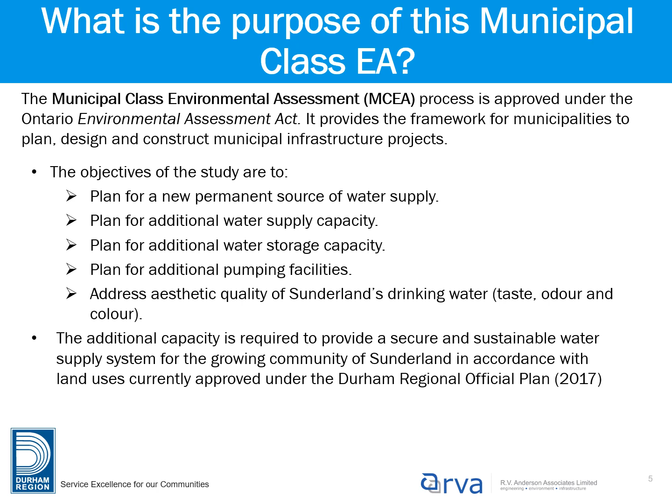As a summary of the project progress to date, this study started in February 2019 with the publication of the Notice of Commencement. The project team identified a problem and opportunity statement, preliminary water supply and water storage alternatives, and proposed evaluation criteria. The project team presented these to the community at the first PIC in June 2019.

Following PIC number 1, the project team completed several supporting studies, including a groundwater exploration program, hydrogeological modeling, natural environmental inventory, cultural heritage assessment, archaeological assessment, and geotechnical investigations. The team then evaluated the alternative solutions for water supply and water storage and identified the preferred alternatives for each, along with phasing to implement the preferred alternatives as Sunderland grows. This brings us to the end of Phase 2 of the Class EA process, where the evaluation results and preferred alternatives are being presented for feedback as part of this PIC.

As a refresher from the first PIC, the study team identified the study area for the project. The study area included as part of this Class EA is outlined in the map on the right-hand side of this slide in the red box. The study area includes the existing urban area boundary for Sunderland, which is outlined in yellow, areas nearby the existing boundary, and the areas where existing municipal wells number 1 and number 2 are located, by Concession Road 6, and the existing water storage standpipe and temporary municipal well number 3 by Jane Street.

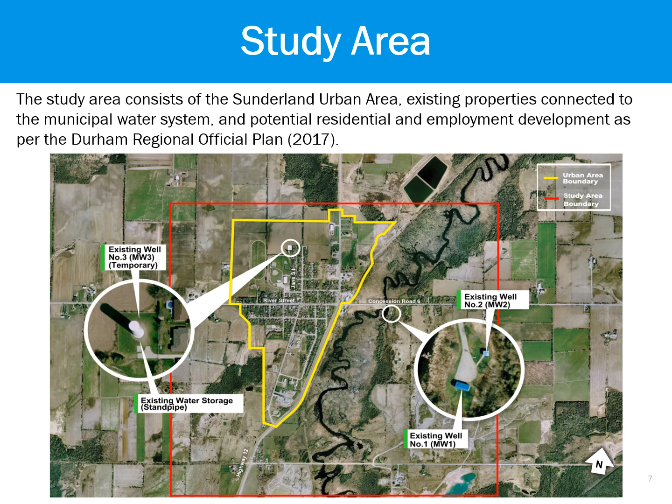From the first PIC, the study team also identified the problem and opportunity statement for the project. The existing Sunderland water supply and storage system requires various improvements to support potential growth for the Sunderland urban area, including upgrading the available water supply, addressing aesthetic water quality, increasing the amount of water storage, and improving the redundancy of the overall system. To address these improvements, this Class EA will identify the preferred environmentally and financially responsible solution.

This solution will provide long-term water supply, water storage capacity, pumping facilities, and redundancy to satisfy existing water demands and support potential growth within the existing Sunderland urban area, as per the land use currently approved under the Durham Regional Official Plan 2017.

Number 2, meet Ontario's drinking water standards for health-related parameters. Lastly, number 3, strive to address aesthetic aspects of the Ontario drinking water standards.

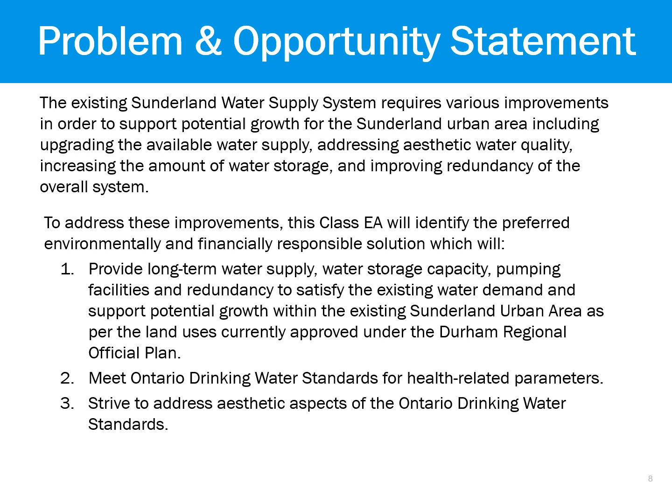Additional studies were undertaken throughout this Class EA to support the development of a list of alternatives, identify potential impacts, identify mitigation measures, and support the evaluation process. Studies include a groundwater exploration program, a geotechnical investigation, hydrogeological modeling, an archaeological assessment, a cultural heritage assessment, and a natural environmental impact assessment.

The results of these studies are included in various aspects of the EA process and presented throughout the upcoming slides.

Now we will go through the water supply aspect of this Class EA. This includes an overview of the existing municipal water system in Sunderland, a timeline of changes to the water supply system, a discussion of the upgrades required and possible solutions, and a recommendation on how to address Sunderland's water supply requirements now and in the future.

The current municipal water system servicing the Sunderland urban area is comprised of 3 municipal groundwater wells. Municipal Well Number 1, or MW1, was built in 1957 and is classified as a groundwater under the direct influence of surface water, or GUDI, with in-situ filtration. Currently, MW1 is only able to operate and supply water at a rate of 8.2 liters per second due to existing operational limitations. However, it does have a higher permitted rate.

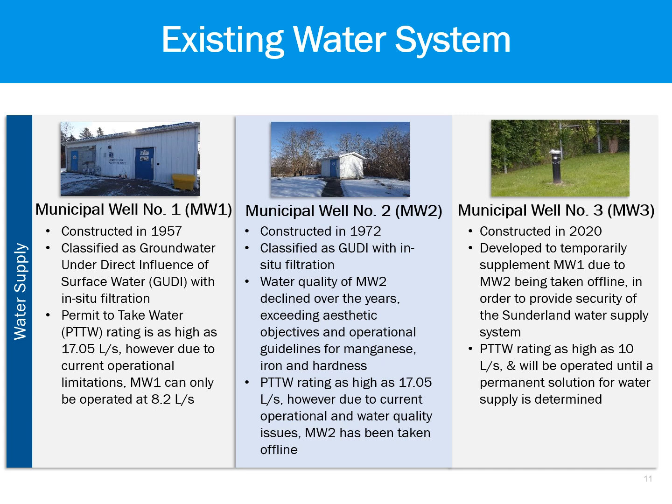Slide 12 provides an overview of the timeline of changes to the Sunderland water supply system and the current Class EA process. In the summer of 2017, MW2 was taken offline as a result of operational and water quality issues. This meant that MW1 was the only well remaining operational to provide water supply to Sunderland.

Due to this, between the summer of 2017 and mid-2018, the region undertook an emergency well exploration program to urgently find a backup groundwater source to supplement MW1. The region identified a new source at the same property as the existing standpipe.

Additionally, during this time, the Ministry of Environment, Conservation and Parks issued a declaration order to permit the installation of an emergency well, i.e. MW3. This order also required the region to complete a Class EA to address Sunderland's long-term water supply needs.

From 2018 to 2020, the region completed the design and construction of the emergency well MW3 and the associated treatment system at the site of the existing Jane Street standpipe. This temporary well has been operating with MW1 to supply water to Sunderland since then.

For the Class EA required by the Ministry, the notice of commencement was issued in February 2019, and the first PIC was held in June 2019. A groundwater exploration program to secure a long-term source of water was completed between winter 2019 and 2020.

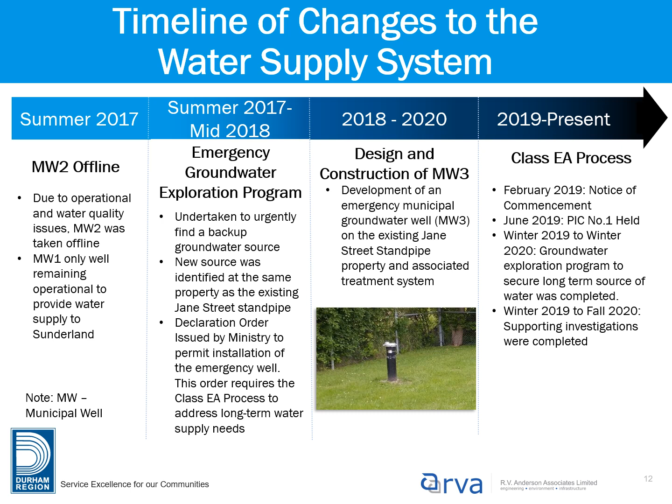As a refresher from the first PIC, this slide presents the required upgrades to the Sunderland water supply system for the long term. We know that the population of Sunderland will grow over time and have estimated that it may grow as high as 4,372 people for the ultimate build-out scenario.

This number is based on the land uses currently approved under the Durham Regional Official Plan. It is important to note that the timeline for this growth from the current date to ultimate build-out is variable. The region will continue to monitor the community's population growth to identify when upgrades are required to the water supply and water storage systems. These upgrades would be implemented in phases over time.

Sunderland's current firm water system capacity is 8.2 liters per second. This total capacity is based on the water supply available to meet the water demands of Sunderland if the largest well is out of service.

Looking to the future, the estimated firm capacity required is 31 liters for ultimate build-out. With MW1 currently operating at 8.2 liters per second and MW3 temporarily operating up to 10 liters per second, the firm capacity of the existing system does not meet the community's needs.

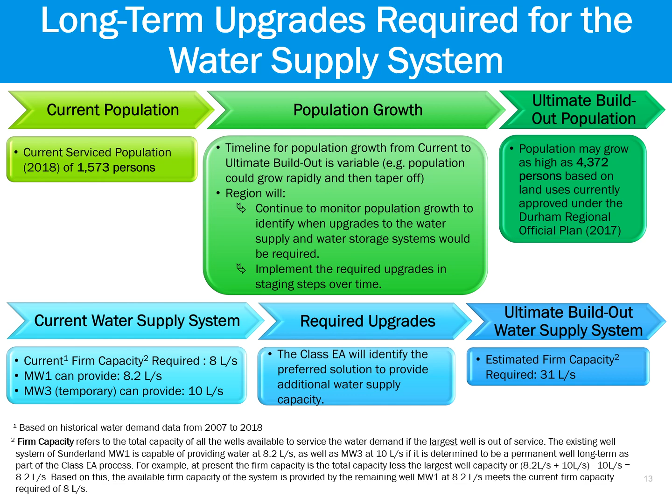Due to this, PIC number 1 identified that additional water supply is needed, and the number of new wells and phasing of the development of these wells would be identified as part of this Class EA.

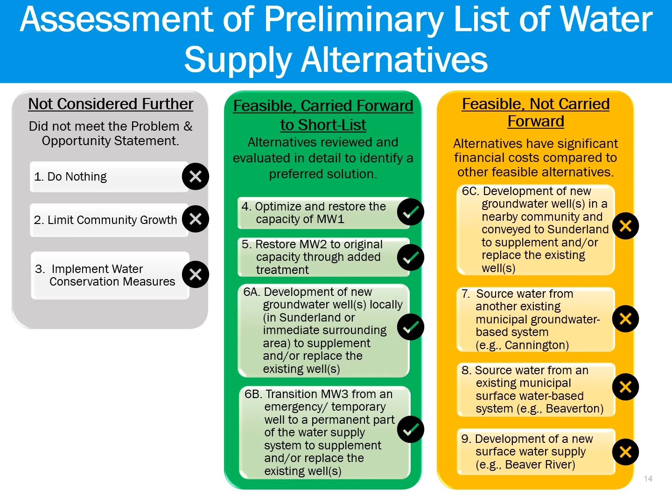A groundwater exploration program was completed in winter 2020 as part of the evaluation of Alternative 6A, development of a new local groundwater well in or immediate to the Sunderland urban area. This program included drilling test wells to determine whether there is a viable groundwater source with sufficient quality and quantity to meet the ultimate build-out needs.

The groundwater exploration program included 3 areas. Area A included the future parkland property west of the existing Jane Street standpipe, and an area to the far west on the Kaitlin Corporation property proposed for future development. Overall, Area A produced a good quantity of water. However, the water quality would require additional treatment, for example, to lower nitrate concentrations.

Area C is on existing property owned by Brock Aggregates just off Concession Road 6 and to the east of existing municipal wells 1 and 2. The groundwater exploration program for this area found that there was good quality of water, however, there was limited quantity.

The final area shown on the map is Area B, which is the right-of-way of Concession Road 5 and St. Mary's Boulevard to the southwest of Sunderland. Area B was not explored as a result of Areas A and C being favorable, and because Area B would be technically complex and have higher economic costs to implement, as it is further away from Sunderland and the existing municipal water system.

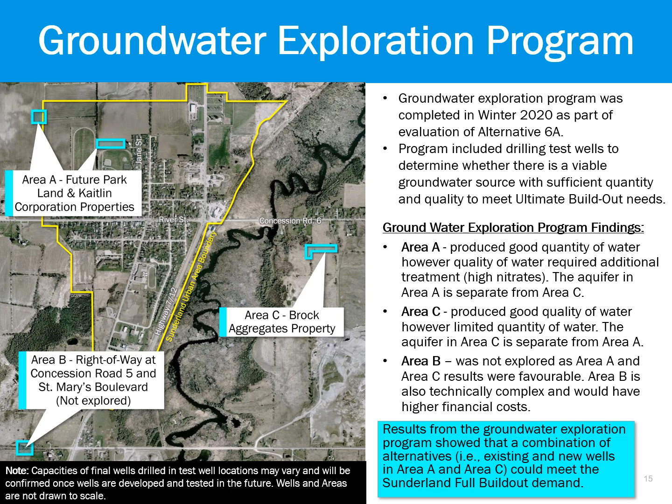The final capacities of the permanent wells may vary depending on the conditions encountered at that time.

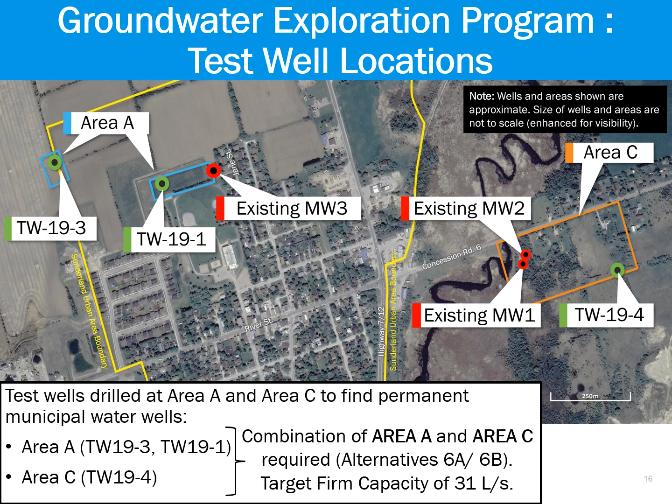The groundwater exploration program also confirmed that Area A and Area C are separate aquifers. This means that using wells in Area A, for example, will not affect the use of wells in Area C, and that both wells have separate water quality characteristics. This provides an opportunity to not only have redundancy of the wells themselves, but also of the aquifers, which are the source of water for Sunderland, leading to a more secure long-term water system if wells are developed in both areas.

Alternative 4, to optimize and restore the capacity of MW1, was not carried forward as a preferred alternative for a long-term water source. MW1 has existing operational and maintenance issues with the existing UV treatment system. It also has deficiencies that limit the ability to increase the flow from the well any further than the existing 8.2 liters per second.

Issues and deficiencies include a decrease in water quality when the well is pumped at a higher flow rate, concerns that the issues with MW2 could occur at MW1 over time, aging infrastructure, operations and maintenance issues with the existing pump house, and that it is located on a moderate to highly vulnerable aquifer, which could require source water protection for MW1. MW1 will continue to be used in the near term, but it is recommended that this well be phased out of service and decommissioned.

Alternative 5, to restore MW2 to its original capacity through additional treatment, was also not carried forward. The existing operational and maintenance issues and deficiencies with MW2 limit the ability to restore this well. In 2017, maintenance of this well was undertaken to try to restore the capacity and quality of the well. However, the water quality remained poor, and the shallow overburden aquifer and confining layers MW2 draws water from was damaged.

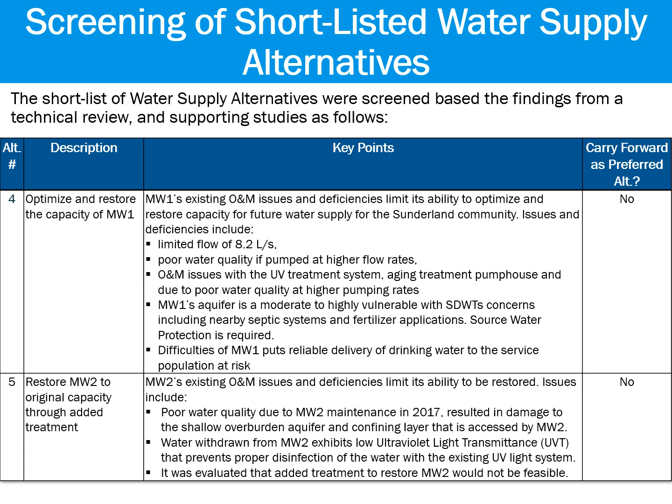Based on the results of the Groundwater Exploration Program, Alternative 6A, to develop a new groundwater well or wells in Sunderland or the immediate surrounding areas to supplement or replace the existing well or wells, was determined to be a feasible alternative. As such, Alternative 6A was carried forward for further evaluation.

Alternative 6B, to transition MW3 from a temporary well to a permanent part of the water supply system to supplement or replace the existing wells in Sunderland, was determined to be feasible, but only in combination with Alternative 6A, where a new groundwater well is still developed. The findings of the Groundwater Exploration Program identified that the capacity of MW3 would not be able to meet the ultimate build-out capacity on its own or with the existing capacity of MW1. As such, Alternative 6B was carried forward for further evaluation in combination with Alternative 6A.

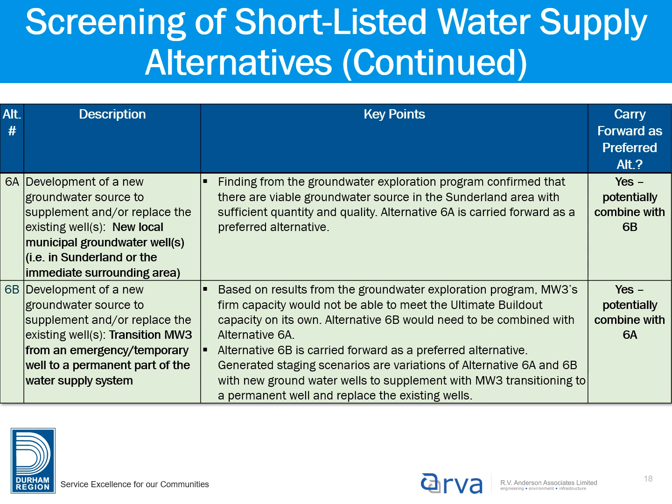Based on the preferred Alternative 6A and/or 6B, potential well capacities and combinations of new wells in Area A and Area C were considered. Considerations included the possibility of transitioning MW3 to a permanent well. Additionally, the phasing of the implementation of a new well, MW3 being transitioned to a permanent well, and when MW1 is taken out of service was reviewed to allow the Sunderland water supply system to be expanded gradually as the demand for water supply grows. 3 staging scenarios were developed and evaluated to meet the ultimate build-out firm capacity requirement of 31 liters per second and are presented on the next slides.

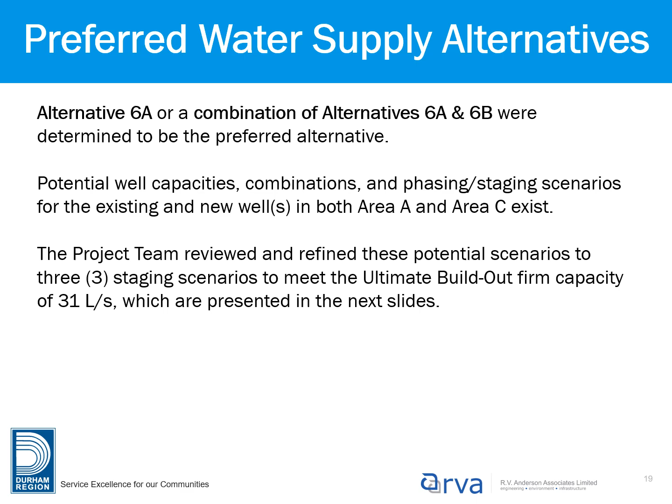As a brief overview, Staging Scenario 1 would be completed in 2 phases. During Phase 1, MW1 would remain online, and MW3 would remain online as a temporary well. New wells would be constructed at the Kaitlin property in Area A by TW19-3. It is estimated that 2 new wells would be required here, 1 duty and 1 standby, with 1 new pump house. Treatment of nitrates is required. This achieves a firm capacity of 31 liters per second within Phase 1.

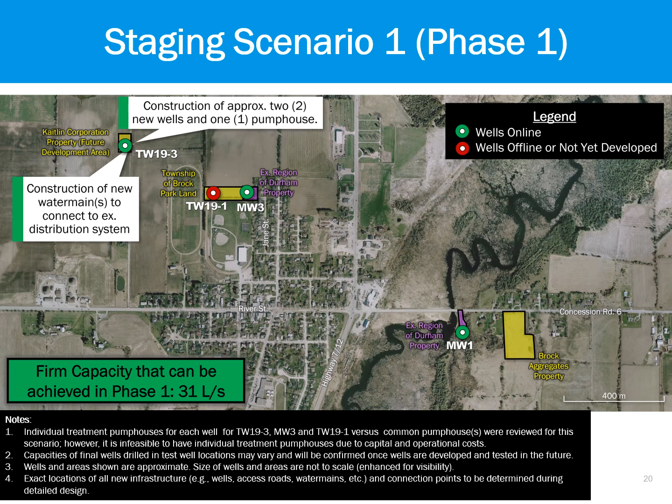In Phase 2 of Staging Scenario 1, MW1 would be decommissioned. The MW3 site would be transitioned to a permanent well, and the existing Nuterra treatment system would be decommissioned. The wells at the Kaitlin property in Area A by TW19-3 would continue to be used. New wells would be constructed at the parkland of Area A by TW19-1, with 1 new well estimated to be required. The pump house at the Kaitlin property would be upgraded to treat water from MW3 and the new well at the parkland. This achieves a firm capacity of 32 liters per second by Phase 2.

Additionally, the region would be looking to secure and protect the land by TW19-4 for a future well site, if determined to be required. The project team also looked at having individual pump houses for each well site, rather than one common pump house for treatment. This was determined to be infeasible due to the operation and maintenance requirements and high economic cost.

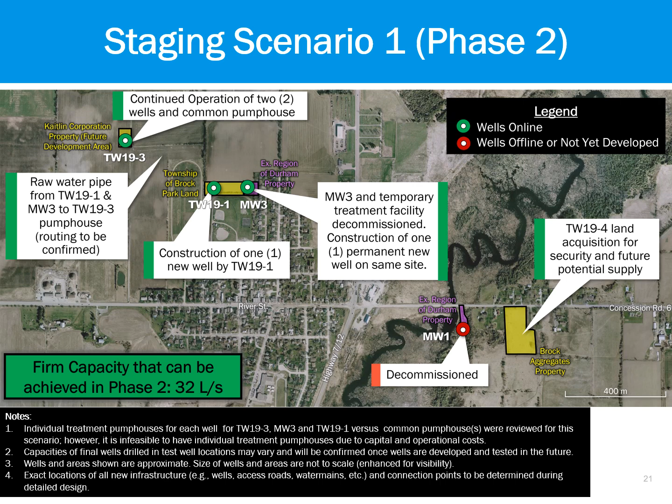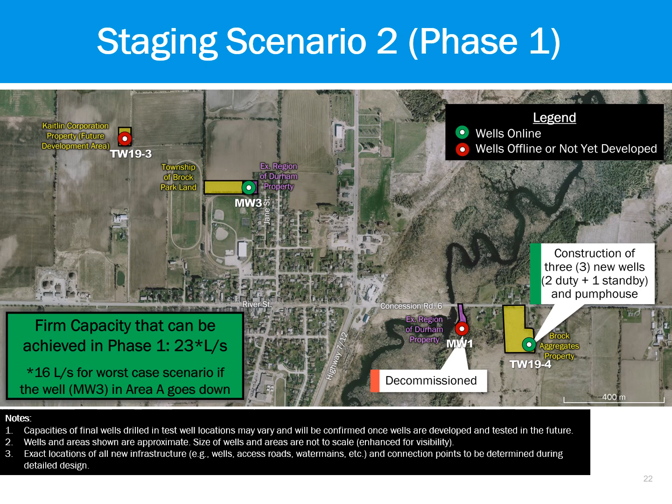Staging Scenario 2 would be completed over 2 phases as well. Phase 1 includes MW3 remaining online as a temporary well. New wells would be constructed at the Brock Aggregates property in Area C by TW19-4. It is estimated that 3 new wells will be required, 2 duty and 1 standby. A new pump house would be constructed to treat these wells. MW1 would then be decommissioned once the new wells in Area C are operational. This achieves a firm capacity of 23 liters per second within Phase 1, with a worst case of 16 liters per second if a well in Area A is out of service unexpectedly.

In Phase 2 of Staging Scenario 2, the new wells and pump house at Brock Aggregates property in Area C by TW19-4 would continue to be used. New wells would be constructed at Kaitlin property in Area A by TW19-3. It is estimated that 2 new wells would be required here, 1 duty and 1 standby, with 1 new pump house. Treatment of nitrates is required. MW3 and its Nuterra treatment system would be decommissioned once the new wells on the Kaitlin property are operational. This achieves a firm capacity of 32 liters per second by Phase 2.

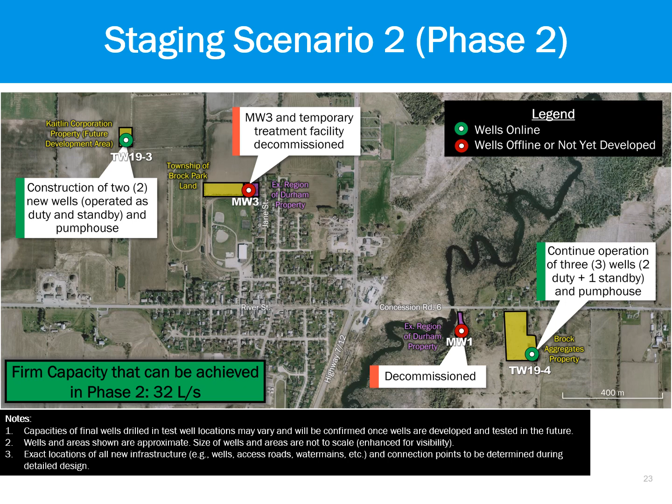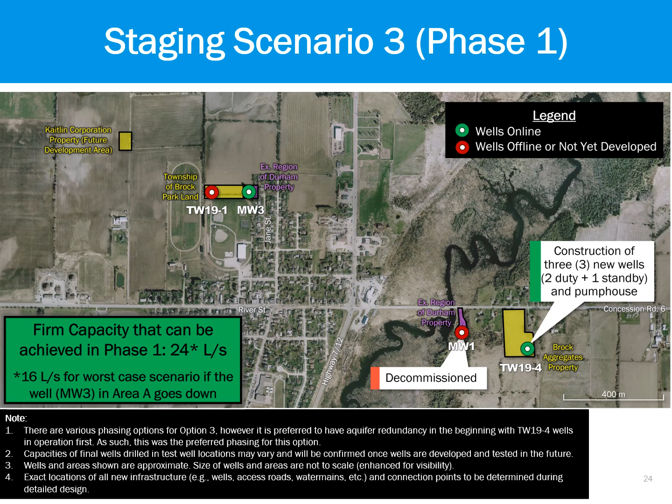Staging Scenario 3 would be completed in 2 phases. In Phase 1, MW3 would remain online as a temporary well. New wells would be constructed at Brock Aggregates property in Area C by TW19-4. It is estimated that 3 new wells would be required, 2 duty and 1 standby. A new pump house would be constructed to treat these wells. MW1 would then be decommissioned once the new wells in Area C are operational. This achieves a firm capacity of 24 liters per second within Phase 1, with a worst case of 16 liters per second if a well in Area A is out of service unexpectedly.

In Phase 2 of Staging Scenario 3, the MW3 site would be transitioned to a permanent well. The existing Nuterra treatment system would be decommissioned, and a new pump house would be constructed. The wells and pump house at the Brock Aggregates property in Area C by TW19-4 would continue to be used. New wells would be constructed at the parkland of Area A by TW19-1, with 1 new well estimated to be required. The raw water from this well would be treated at the new pump house at the MW3 site. This achieves a firm capacity of 32 liters per second by Phase 2.

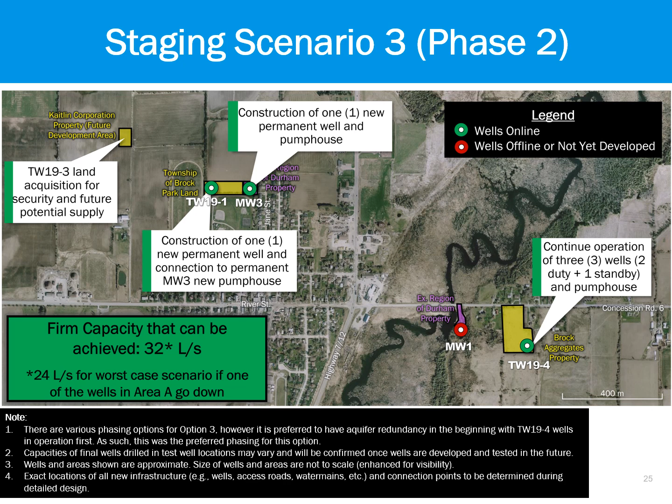Additionally, the region would be looking to secure and protect the land by TW19-3 in the Kaitlin property of Area A for a future well site, if determined to be required. The project team also identified that it is preferred to have aquifer redundancy as soon as possible. This staging scenario looks at developing new wells in Area C while keeping wells in Area A online. Staging scenarios which did not prioritize aquifer redundancy were identified and not evaluated.

Slide 26 summarizes the preferred wells and requirements for phasing of the 3 staging scenarios presented in slides 20 to 25. In summary, Staging Scenario 1, Phase 1 will achieve ultimate build-out capacity early and will provide aquifer redundancy. In Phase 2, the ultimate build-out capacity will continue to be achieved and will reduce the risk of relying on MW1 long-term, with MW1 decommissioned. However, there will be no aquifer redundancy once MW1 is offline.

For Staging Scenario 2, a firm capacity of 24 liters per second will be achieved in Phase 1. This allows for growth. However, ultimate build-out firm capacity is not achieved during this phase. Phase 1 will also reduce the risk of relying on MW1 long-term and will provide aquifer redundancy. In Phase 2, ultimate build-out capacity will be achieved. However, temporary MW3 will be decommissioned, and the associated infrastructure will not be used long-term.

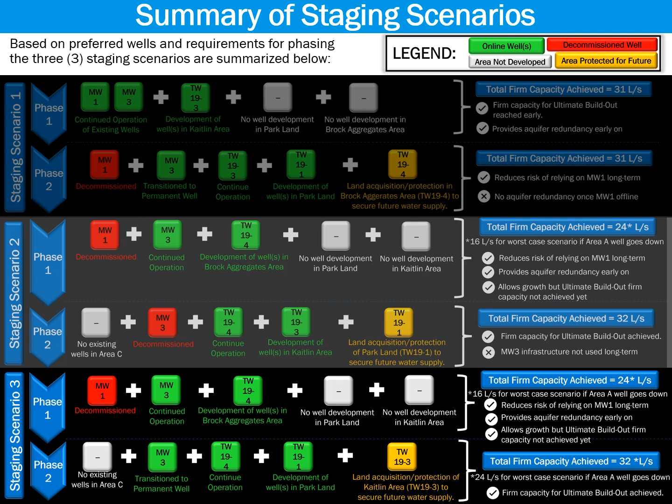For Staging Scenario 3, a total firm capacity of 24 liters per second will be achieved in Phase 1, which allows for growth. However, ultimate build-out firm capacity is not achieved during this phase. Phase 1 will also reduce the risk of relying on MW1 long-term and will provide aquifer redundancy. In Phase 2, ultimate build-out capacity will be achieved.

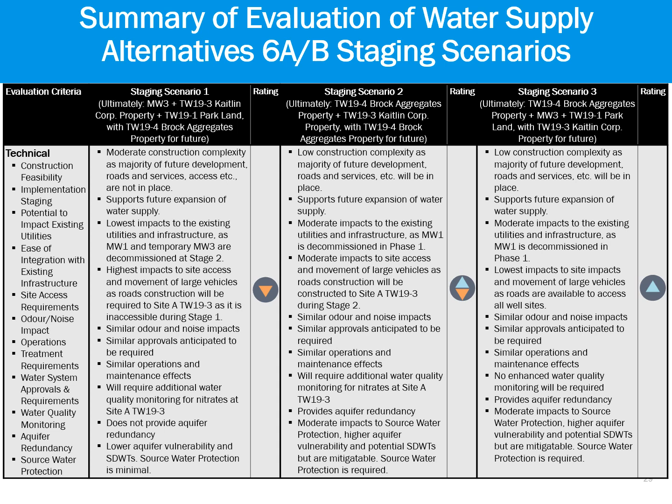Economic: Scenario 3 was evaluated as most aligned with the economic criteria, receiving an overall score of 4, well aligned. Scenario 2 was next with a score of 3, somewhat aligned, followed by Scenario 1 with a score of 2, not well aligned.

Scenario 3 has the lowest overall capital cost because less pumping stations and treatment facilities are needed compared to the other scenarios. This scenario also has the lowest operation and maintenance costs because it has fewer pumping stations. There is no need for the addition of nitrate treatment as no wells are developed in the Kaitlin property in Area A, and it requires shorter water main and access road connections as the parkland and Area C are close to existing infrastructure. Overall, this results in the lowest life cycle cost of the three scenarios by approximately $4 to $8 million.

Scenario 2 scored slightly lower due to moderate capital, operation, and maintenance costs anticipated for the increased pumping station and treatment infrastructure and associated nitrate level testings. Scenario 1 scored the lowest due to the highest capital costs related to longer access road construction of raw water mains and treated water mains connection to the existing distribution system, and nitrate treatment and testing requirements.

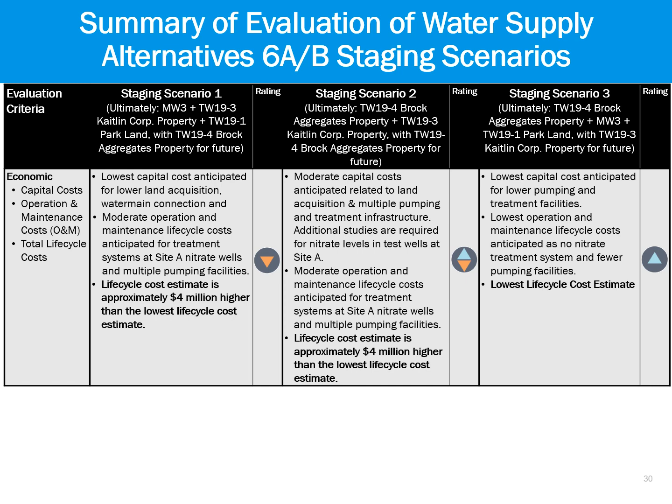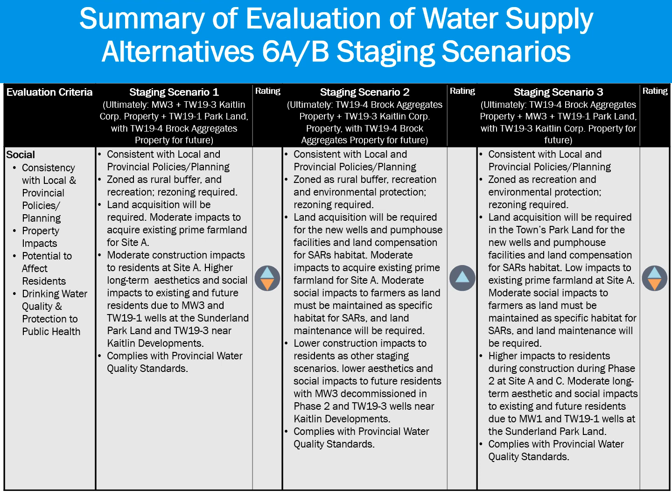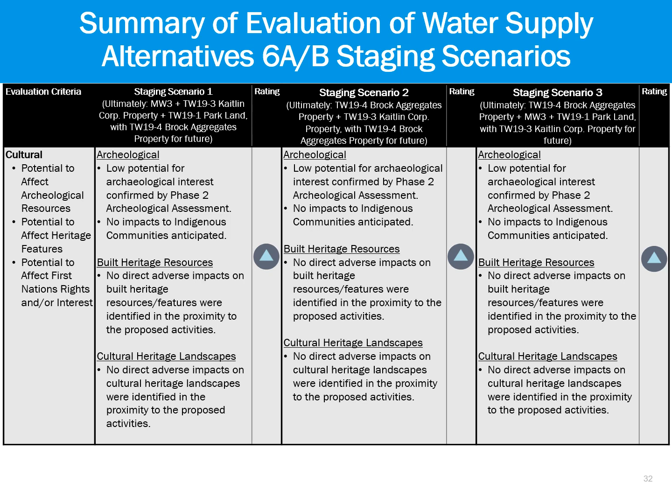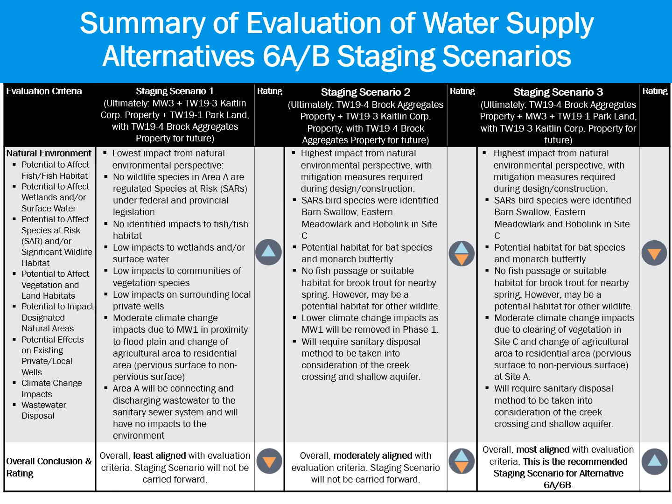Based on the ratings for each criterion for the 3 staging scenarios, overall, staging Scenario 3 was determined to be the most aligned with the evaluation criteria. Based on the evaluation results, a combination of alternative 6A and 6B with staging Scenario 3 is the recommended preferred alternative for water supply. As a brief recap, this would include new wells and a pump house by TW19-4 Brock Aggregates property, transitioning MW3 to a permanent well with a new pump house.

New well by TW19-1 with treatment at the pump house by MW3, securing the land by TW19-3 on Kaitlin Corp. property to be protected for future water supply. Each well will require connecting water mains to the nearby pump house for treatment and access roads to the wells.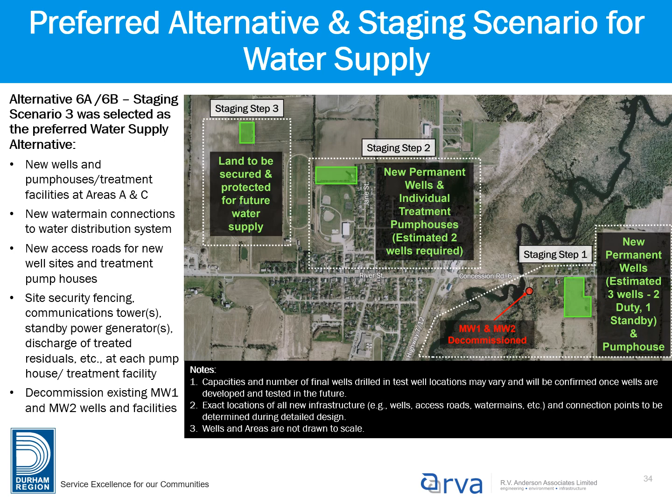Each pump house will require connecting water mains to the distribution system, access roads, security fencing, communication towers, standby power generators, and discharge of treated residue. Note that the capacities and final number of wells drilled in the test well locations may vary and will be confirmed once wells are developed and tested in the future. Additionally, exact locations of all infrastructure, such as wells, access roads, and water mains, and connection points will be determined during the detailed design stage of the project.

Slide 35 shows a closer look at the Area C wells and associated requirements. In staging step 1A, permanent wells will be developed in Area C. It is estimated that 3 wells will be required: 2 duty wells that operate normally, and 1 standby well which will operate when one of the duty wells is not in service.

In staging step 1B, MW1 will be decommissioned once the new Area C wells are online. MW2 will also be decommissioned at this time, if not completed sooner. Additionally, the region will coordinate with Brock Aggregates to secure the property required.

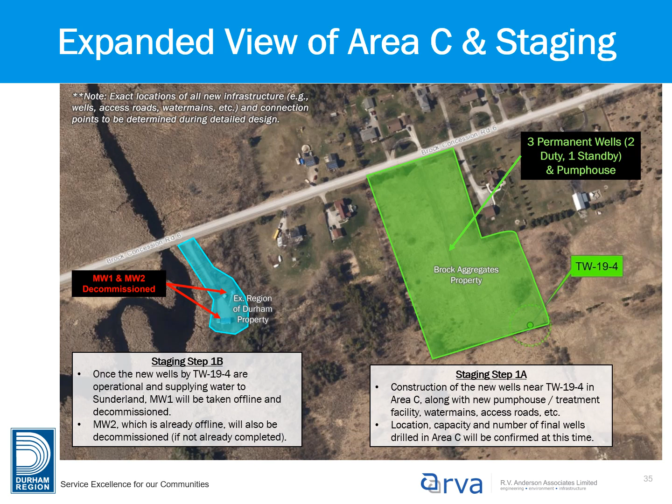Slide 36 shows a closer look at the Area A wells and associated requirements. In staging step 2A, MW3 will be developed from a temporary well to a permanent well in Area A. A new pump house will be constructed to treat both MW3 and the future well developed by TW19-1. In staging step 2B, a new well will be developed near TW19-1 and treated by the pump house next to MW3.

As part of stage 2A and 2B, the region will monitor population growth and water demands to determine the approximate time to implement the transition of MW3 and the development of a new well at Area A. These could occur at the same time, or phased and implemented separately as needed.

In staging step 3, additional wells will only be developed in the Kaitlin property of Area A if additional capacity is required above what is attained in Phase 1 and 2. Due to the nature of the test and permanent wells and changing groundwater conditions, actual final well capacities of permanent wells developed in Phases 1 and 2 may vary, change, or deteriorate.

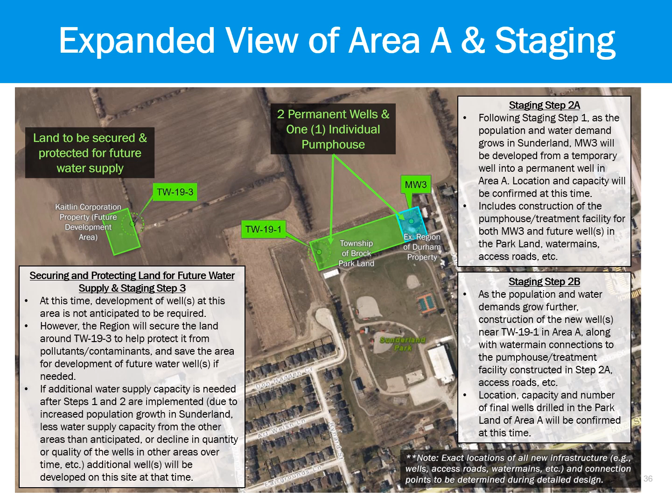As a result, additional wells may be required to reach the ultimate buildout firm capacity of 31 liters per second, if the capacity of the wells from Phases 1 and 2 are not sufficient when ultimate buildout is reached. The region will coordinate with Kaitlin Corporation to secure and protect the land by TW19-3 in the Kaitlin area, and the Township of Brock to secure the property required at the future parklands.

As part of the Class EA, a wellhead protection area, or WHPA, and significant drinking water threats were evaluated for the preferred water supply alternative. Slide 37 shows the existing wellhead protection area for the Sunderland water supply system with MW1 and MW3 in operation. A wellhead protection area is an area surrounding a municipal well vulnerable to significant drinking water threats such as pollutants or contaminants. Significant drinking water threats released into the WHPA could reach the municipal well and contaminate the water source.

WHPA-A is the immediate area within a 100-meter radius of the municipal well. It is the most vulnerable area in the WHPA, and significant drinking water threats released here could reach the municipal well very quickly. If you live or work in a WHPA area, there are certain requirements or restrictions to help protect the municipal well from pollutants or contaminants.

For example, if you have a septic system in the WHPA-A area, the system will need to be properly maintained and inspected every 3 years. For fuel storage and chemical handling in the WHPA, a risk management plan needs to be in place. Certain agricultural activities may be prohibited.

Significant drinking water threats in the existing WHPA-A include septic systems managed by inspection every 3 years, and agricultural activities including application of fertilizer, manure, and pesticides on farmland within the wellhead protection area. This threat can be managed through a risk management plan.

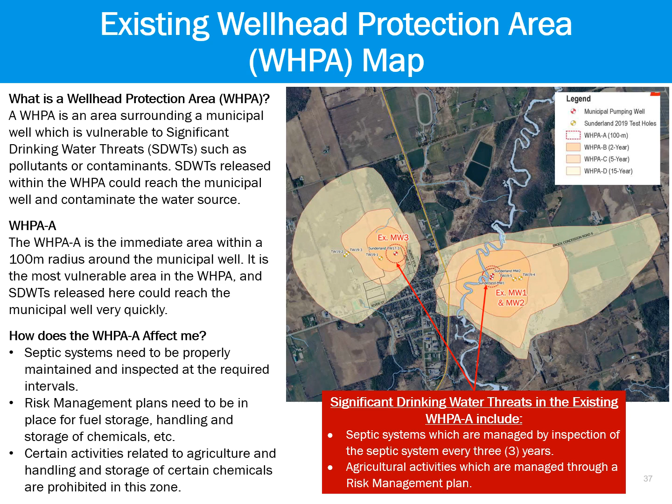Slide 38 shows a possible future wellhead protection area map. This figure was simulated based on presently available data from pump tests. Modeling shows the conservative outcome for scenario 3, including future wells in the Kaitlin Corporation property. However, the preferred scenario only plans to secure the Kaitlin property as a future potential water source. The WHPA maps will be reviewed further and refined once the municipal wells are constructed.

For the future possible WHPA maps, significant drinking water threats include septic systems managed by inspection every 3 years, and agricultural activities including the application of fertilizer, manure, and pesticides on farmland, managed through a risk management plan.

Commercial activities include storage of solvents and chemicals heavier than water within the employment lands near Highway 12 and Concession Road 6, managed through a risk management plan.

Looking at a comparison of the existing WHPA to the potential future WHPA, the overall WHPA in Area C is similar in shape and size to the existing WHPA. There is not a significant number of properties new to the WHPA area, and potential restrictions for the new wells at TW19-4 are close to existing MW1 and MW2. The WHPA-A in Area C moves to the east with the construction of new wells.

Properties specifically in these areas may have stricter requirements than before. The overall WHPA in Area A is larger than the existing WHPA when only MW3 was online.

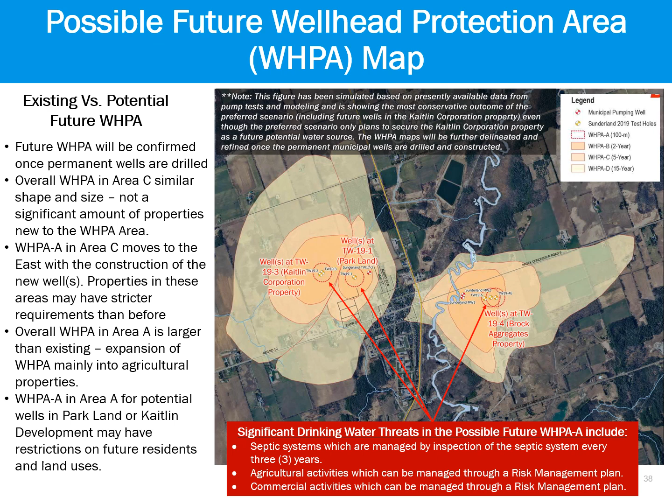The expansion of WHPA in Area A is mainly into agriculture properties which will be developed in the future by Kaitlin Corporation as new subdivisions. The WHPA-A in Area A for the potential wells in parkland or the west side of the Kaitlin development may restrict future residents and land uses.

That brings us to the end of the water supply update for the Class EA. We will now go over the water storage update. This section will discuss the existing water storage system, the storage system required upgrades, a discussion of the alternatives considered, and a recommendation for Sunderland's water storage systems.

The current municipal water storage system servicing the Sunderland urban area consists of an existing water standpipe located on James Street and a distribution system with 9 kilometers of water main. The Sunderland urban area is serviced by one pressure zone. The existing standpipe was built in 1979 and has a total usable storage volume of 0.93 megaliters.

The current storage capacity of this existing standpipe was determined to be insufficient to accommodate the existing Sunderland population, based on the current Ministry of the Environment, Conservation and Parks, or MECP, design criteria. In addition, the region experiences operational and maintenance issues, including stagnation and freezing due to poor mixing.

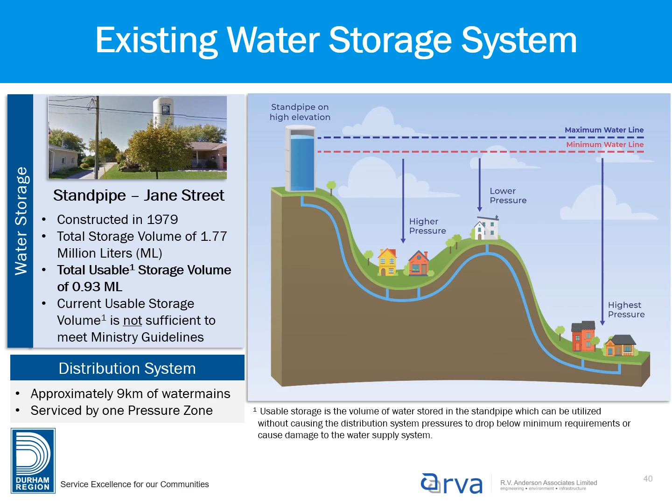Water pressure at homes in a service area are typically set within a certain pressure range. The goal is to have a standpipe that provides water at the MECP's acceptable pressure range. For homes at the highest point in the water system, that would be 275 kPa or 40 psi. For homes at the lowest point in the water system, that would not be more than 689 kPa or 100 psi. Durham Region standards for a maximum pressure of the distribution system is 696 kPa or 101 psi at the lowest serviced elevation.

As a refresher from PIC number 1, and similar to slide 13, slide 41 presents the required upgrades to the Sunderland water storage system long term. As noted in slide 13, the population of Sunderland may grow as high as 4,372 persons for ultimate build-out, based on the land uses currently approved under the Durham Regional Official Plan.

To accommodate for growth in the community of Sunderland to the ultimate build-out population, upgrades to the water storage systems are required. For the water storage system, the estimated water storage required is 2 megaliters for ultimate build-out. The existing Sunderland standpipe has a total usable storage capacity of 0.93 megaliters. This would be insufficient storage capacity to meet the ultimate build-out requirement. In addition, the existing standpipe does not have sufficient pressure available to service future service areas elevation of 260 meters to 290 meters. As a result, it was identified that additional water storage of 1.1 megaliters is needed.

A preferred solution, including the type and the number of new water storage facilities, storage locations, topography, and phasing of the development of the water storage facility, would be identified as part of this Class EA.

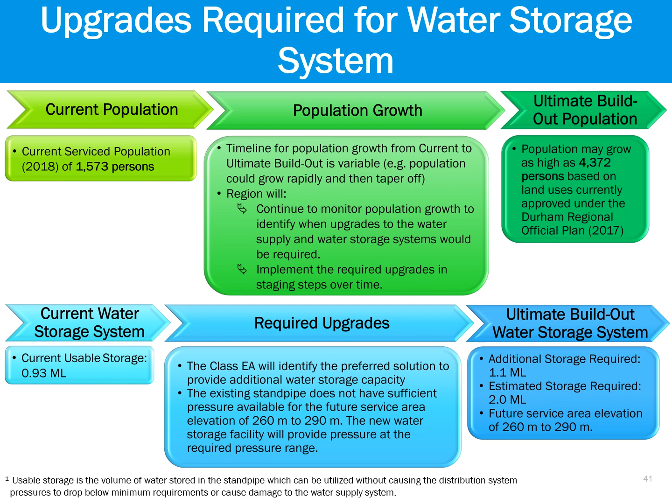The preliminary list of water storage alternatives on this slide was presented in PIC number 1. Alternatives 1 to 3 in the first column on the left were do nothing, limit community growth, and implement water conservation measures. These were not considered further than PIC number 1 as they did not meet the problem and opportunity statement. Alternative 6 in the third column on the right is not a technically feasible solution and was not considered further, as it does not address the required storage volume to meet the ministry's guidelines.

Alternative 6 includes keeping the existing standpipe and supplementing water storage needs with additional pumping. This would include significant modifications to the standpipe to meet the new service pressure requirements.

Alternatives 4 to 5B are possible alternatives shown in the second column in the middle. Alternative 4 considered constructing a new water storage facility at a new location to supplement the existing standpipe. Alternative 5A considered constructing a new water storage facility and decommissioning the existing standpipe, with the new facility built at the existing standpipe location. Alternative 5B considered constructing a new water storage facility and decommissioning the existing standpipe, with the new facility built at a new location.

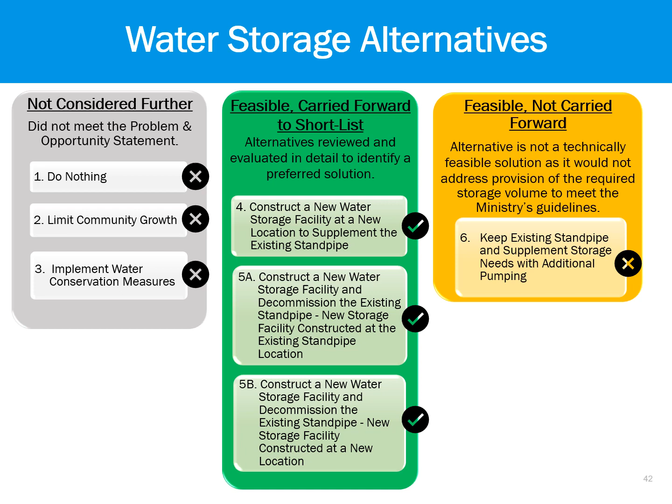Alternatives 4 to 5B were reviewed further since PIC number 1. Based on the technical evaluation and known existing conditions and limitations of the existing standpipe, the short list of water storage alternatives was screened further, as shown on the table on slide 43.

Alternative 4, to construct a new water storage facility at a new location to supplement the existing standpipe, was not carried forward as a preferred alternative for long-term water storage. This alternative was evaluated as technically complex to supplement the existing standpipe due to additional operation and maintenance requirements and operating costs for two water storage facilities. The current service limits of the Sunderland water supply system would also need to be adjusted to provide the required storage at sufficient pressures. Due to the limitations of the existing standpipe, it would be technically complicated to operate the new water storage facility and the existing standpipe at different hydraulic grade lines.

Alternative 5A, to construct a new water storage facility at the existing standpipe location and decommission the existing standpipe, was also not carried forward. The existing Sunderland water storage site has limited space to build a new water storage facility before decommissioning the existing standpipe. As such, construction of this alternative would be technically complex and infeasible.

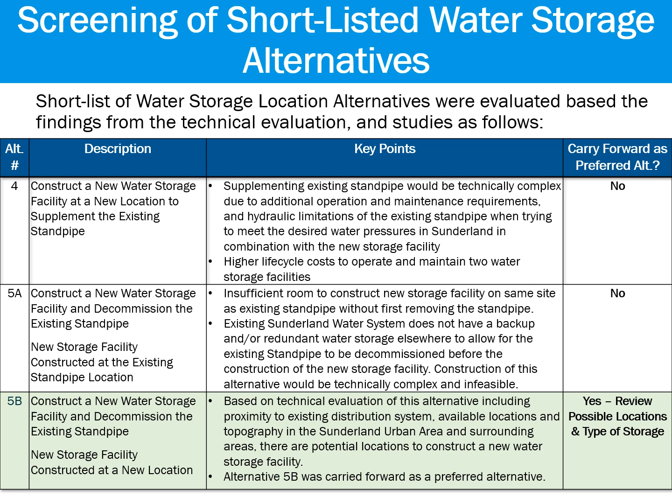Alternative 5B, to construct a new water storage facility at a new location and decommission the existing standpipe, was determined to be a feasible alternative. Based on technical evaluation, including proximity to the existing distribution system, available locations, and topography in the Sunderland urban area and surrounding areas, there are potential locations to construct a new water storage facility. As such, Alternative 5B was carried forward as the preferred alternative for further evaluation.

Four types of storage technologies were evaluated. They include, number 1, a standpipe. A new standpipe would have the same operational issues as the existing standpipe due to stagnation and freezing. In addition, Sunderland's low topography would not accommodate the ultimate build-out growth and the system pressures required. As such, a standpipe would not be feasible and was not carried forward.

Number 2, an elevated tank, or ET. An elevated tank would provide sufficient storage volume to meet the ultimate build-out demands while addressing pressure and hydraulic grade line issues currently experienced with the existing standpipe. An elevated tank is a feasible solution and was carried forward.

Number 3, an in-ground gravity reservoir, at high elevations. Due to Sunderland's low topography, the in-ground reservoir would not be feasible, as water from the reservoir would not flow by gravity to the homes and provide the required pressures. This option was not carried forward.

Number 4, a booster pumping station and in-ground tank. An in-ground reservoir with a booster pumping station would provide the required storage and pressures to the Sunderland system. However, the footprint of the reservoir would be much larger than the base of an elevated tank pedestal, resulting in higher excavation costs and potential for groundwater impacts during design and construction. The booster pumping station adds a second pumping point within the system, in addition to the various groundwater wells, increasing the system's operational complexity and maintenance requirements. Overall, while this option is feasible, it was not carried forward as it would be more expensive and have higher operational maintenance impacts than other options.

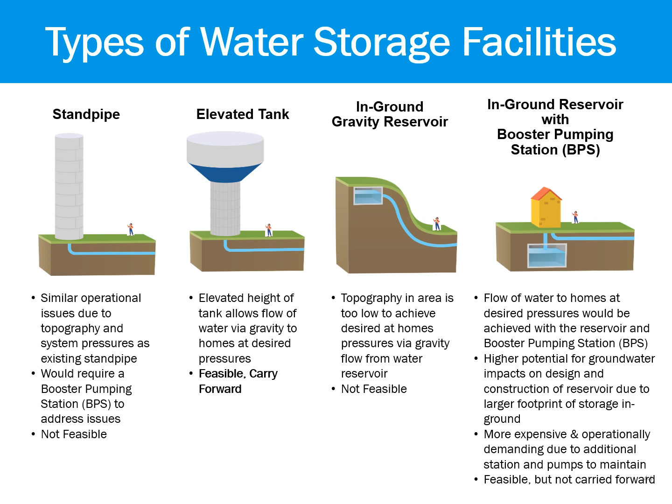Land use: locations that are forested, part of natural heritage systems, existing residential zones, recreational facilities, commercial uses, or areas with existing infrastructure which would interfere with water storage, such as a communication tower. Distance: locations too far from urban settlements and the existing regional distribution system. The further the distance a water storage facility is from the distribution system, the higher the overall cost would be due to the increased infrastructure required to connect the elevated tank to the existing system.

Water main redundancy: locations with a single water main path from the water storage facility to the service area will not provide water main redundancy due to failure of water main paths. Space limitations: locations already densely populated with residential or commercial buildings have insufficient land space available for a new water storage facility and construction scaffolding.

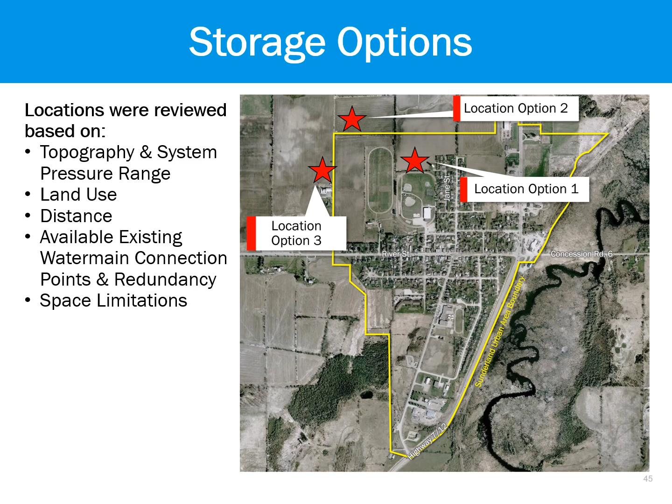Based on the screening and evaluations presented, multiple location options in the Sunderland urban area and surrounding areas were screened further, and a shortlist of 3 location options were carried forward for detailed evaluation. The map shows 3 potential options for the location of a new elevated tank: Storage location option 1, Township of Brock's Parkland; option 2, North Kaitlin Development; and option 3, West Kaitlin Development.

Storage location option 1 is located in the Township of Brock's Parkland, within the Sunderland urban area. The property is owned by the Township of Brock and is currently zoned as recreational. This area has adequate space for a new elevated tank and associated infrastructure, including connection to a nearby stormwater management pond for occasional draining of the tank for maintenance, and is in proximity to the existing standpipe, existing water main, and surrounded by residential areas. Compared to the other locations, this area is at a slightly lower elevation, resulting in increased tank costs.

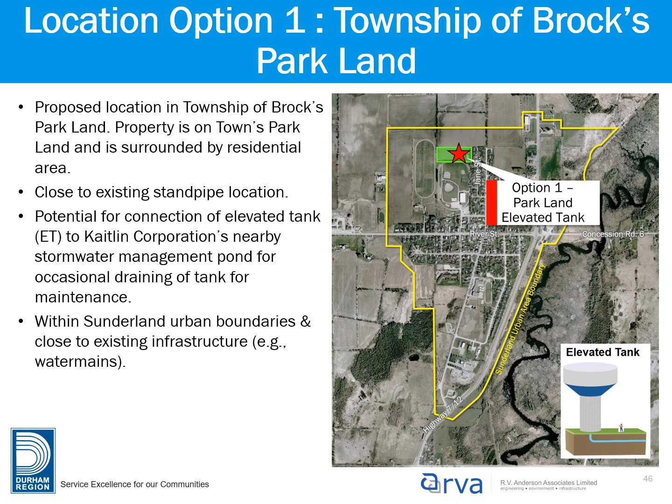Storage location option 2 is located in the North Kaitlin development area, outside of the Sunderland urban area. The property is owned by the Kaitlin Development and is currently zoned as development. This area has adequate space for a new elevated tank and associated infrastructure, such as stormwater connection to a nearby stormwater management pond. The tank can be drained for maintenance and would be close to future residential areas. However, this location is further from the existing regional distribution system and urban settlement areas, and the overall cost for connecting infrastructure would be higher than option 1. A longer paved access road to the ET would also be required, adding to the cost.

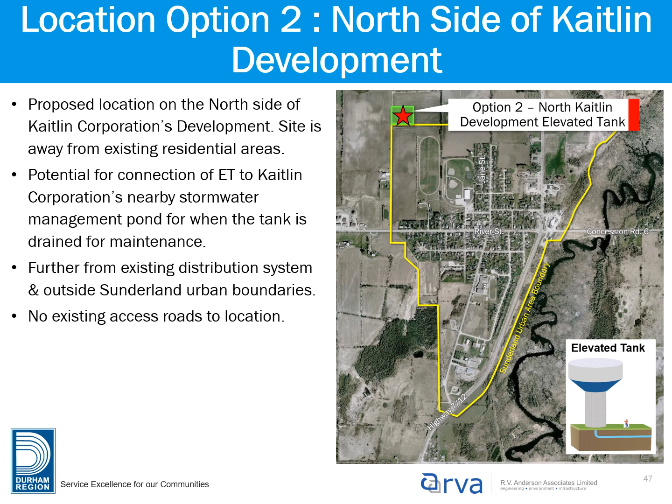Similar to option 2, option 3 is located in the West Kaitlin development area, outside the Sunderland urban area. The property is owned by the Kaitlin Development and is currently zoned as rural buffer. This area has adequate space for a new elevated tank and associated infrastructure, such as a stormwater connection to a nearby stormwater management pond for when the tank is drained for maintenance. It will also be close to future residential areas. However, this location is further from the existing regional water mains, and the overall cost would be higher compared to option 1. A longer paved access road to the ET would also be required, adding to the costs and construction impacts to the Kaitlin development area.

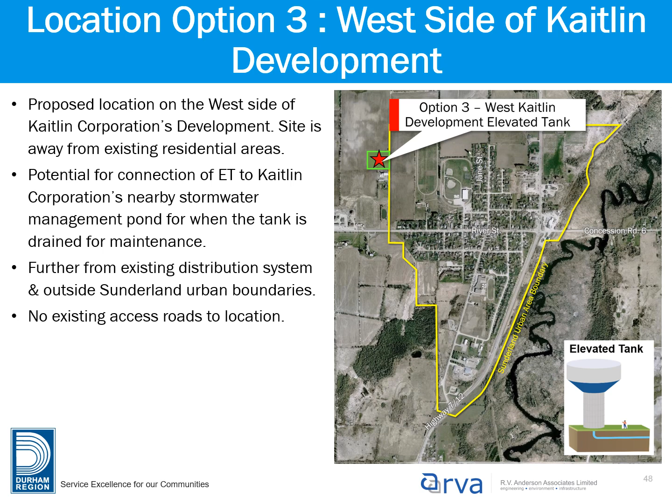Number 2, economic criteria. This includes the life cycle cost of the new elevated tank and associated infrastructure. The life cycle cost considers the estimated capital cost, operation, and maintenance costs. This also considers the sustainability and affordability of the alternative.

Number 3, social criteria. This includes consistency with local and provincial policies and planning, property impacts, potential to affect residents, drinking water quality, and protection to public health.

Number 4, cultural criteria. This includes potential to affect archaeological resources, to affect First Nation rights or interests, built heritage resources/features, and cultural heritage landscapes.

Number 5, natural environmental criteria. This includes the effect on fish or aquatic habitats, wetlands or surface water, vegetation, terrestrial habitats, species at risk and/or significant wildlife habitats, designated natural areas of significant interest, climate change, and wastewater disposal.

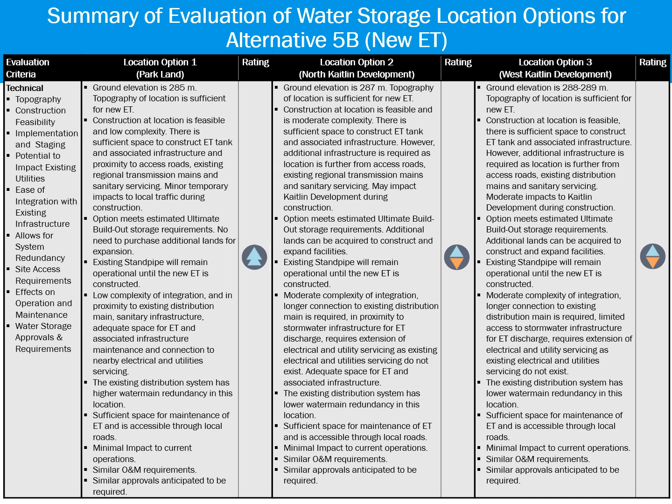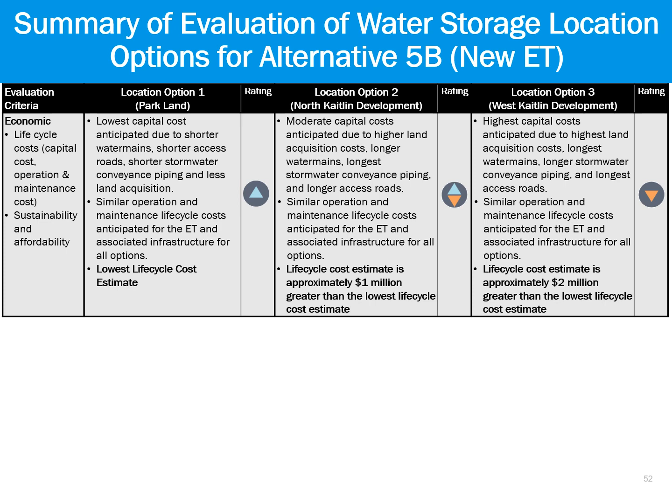Number 2, economic. Location option 1 was evaluated to be the most aligned with this criterion with an overall score of 4, well aligned, followed by option 2 with an overall score of 3, somewhat aligned, and option 3 with an overall score of 2, not well aligned. Location option 1 has the lowest capital cost based on the lower cost anticipated for land acquisition and the lower cost for water main and access roads compared to the 2 alternatives. All 3 alternatives would have similar operation and maintenance costs.

Number 3, social. Location option 2 was evaluated to be the most aligned with this criterion with an overall score of 4, well aligned, followed by both locations option 1 and 3, which each received a score of 3, somewhat aligned. All location options were consistent with local and provincial policies and comply with provincial water quality standards. Option 2 scored higher than the other options due to lower anticipated construction impacts to existing residents and moderate aesthetic and social impacts anticipated to future surrounding residents at the North Kaitlin development.

This location is outside the Sunderland urban boundary, however, it is close proximity to the urban boundary. Land acquisition would be required, however, there would be no impacts to farmlands. Rezoning would be required as the property is owned by Kaitlin Development and is currently zoned as development. Option 1 scored slightly lower than Option 2 due to moderate social and aesthetic impacts.

These impacts include the acquisition of the Township of Brock's parkland for construction and operation of the new ET, temporary visual, noise, and traffic impacts during construction in residential areas, and the long-term visual impacts of the ET on the residents who are used to having the standpipe nearby instead. This location is within the Sunderland urban boundary. Rezoning will be required as the property is owned by the Township of Brock and is currently zoned as recreational.

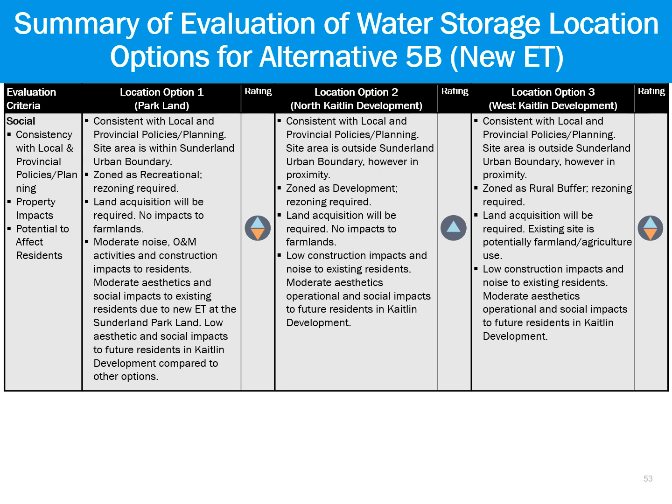Cultural. All 3 location options were evaluated to be the most aligned with this evaluation criteria with an overall score of 4, well aligned. All location options were also determined to have no direct adverse impacts on built heritage resources/features in cultural heritage landscapes based on the results of the cultural heritage assessment.

Options 1 and 2 have low potential for archaeological interest based on the results of the archaeological assessment. Option 3 may have potential for archaeological interest as no archaeological assessment has been completed for this location. If this location is preferred, an archaeological impact investigation is required. Additionally, no impacts to indigenous communities are anticipated for all scenarios.

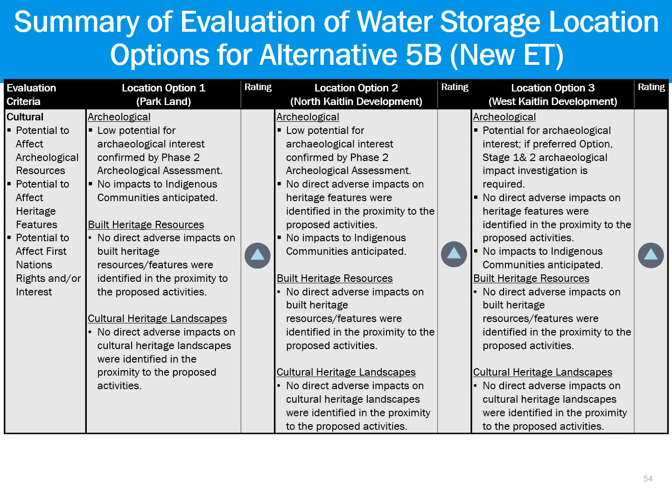Options 1, 2, and 3 would require a stormwater management connection to a nearby stormwater management pond.

Based on the ratings for each of the criteria of the 3 alternatives discussed, Option 1 was determined to have the lowest construction and implementation complexity and the lowest capital cost, while having similar or lesser social, aesthetic, technical, archaeological, and environmental impacts compared to Options 2 and 3. As such, storage location Option 1 is recommended as the preferred location for the new Sunderland elevated tank.

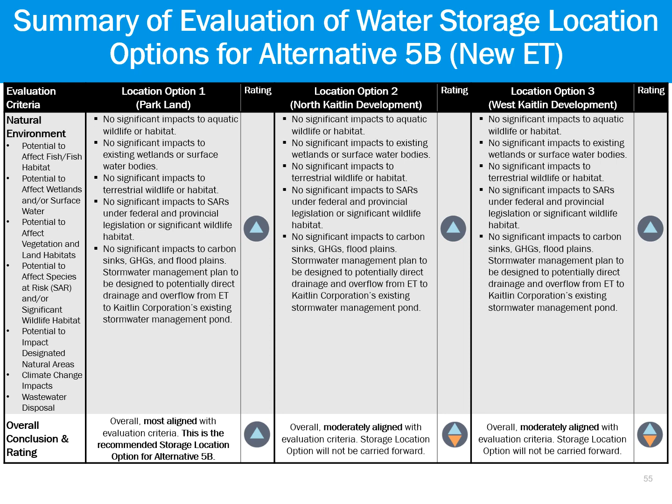Number 3, an easement toward Jane Street and an easement toward the North Kaitlin development area will be required to connect the tank to a nearby stormwater management pond and to provide an access road to the elevated tank and wells. The new tank would be approximately 45 meters tall above ground level. Number 4, various other site amenities such as site security fencing, a communication antenna, a standby power generator, etc.

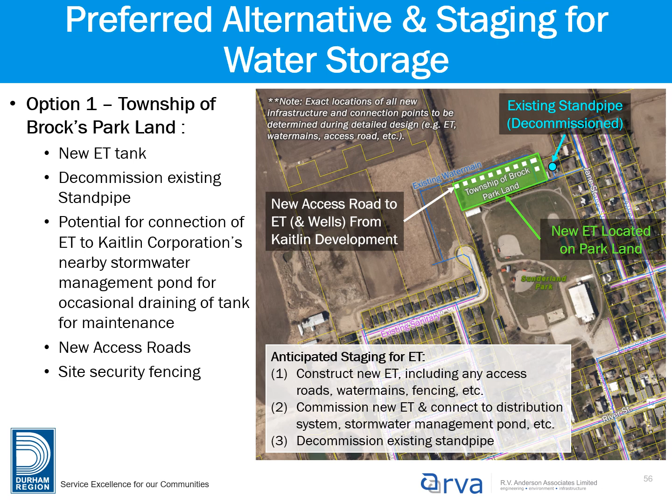Once the new elevated tank is constructed and operational, the existing Sunderland standpipe will be decommissioned.

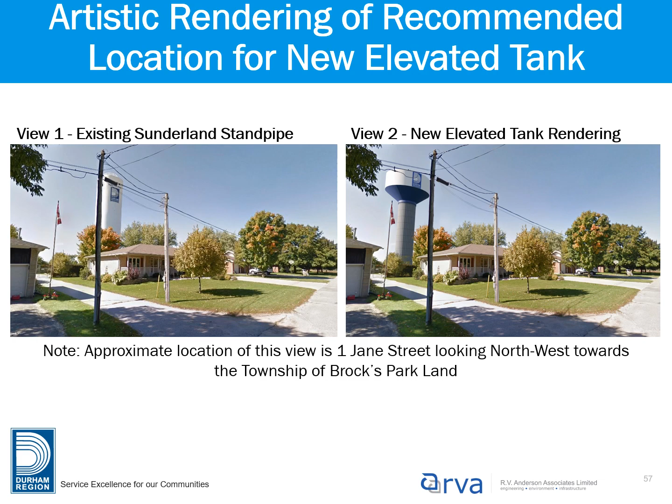Slide 57 shows one rendering of the new elevated tank at the recommended location of 1 Jane Street. View 1 is the before view of the existing Sunderland standpipe along 1 Jane Street looking northwest towards the Township of Brock Parkland. View 2 is the after view of the new Sunderland elevated tank along 1 Jane Street looking northwest towards the Township of Brock Parkland.

This brings us to the end of the water storage update for the Class EA. We will now present the next steps for this Class EA.

The next steps for the project team will be to: Number 1, review and consider public input and comments received after this PIC. Number 2, prepare the Class Environmental Assessment Project File Report summarizing the entire study results. Number 3, issue a notice of completion and publish the project file report on the public record for a final public review period of 30 days. Number 4, finally, review any further comments from the community during the 30-day review period and complete the Class Environmental Assessment process.

Once the Class EA process has been completed, the Region of Durham will begin conceptual design of the water supply and storage alternatives. This includes completing the topographic survey of the sites and undertaking geotechnical and/or hydrogeological investigations for the preferred locations of the new water supply and water storage alternatives. Detailed design and construction of the new wells and associated pump house, and of the new elevated tank and associated system improvements, will then follow.

In terms of the anticipated timeline, we ask that all comments or questions about this PIC and the materials presented be submitted to the project team by October 27, 2021, which is 4 weeks from when this virtual PIC was posted online. We anticipate that the notice of completion and the project file report will be available for your review in late 2021.